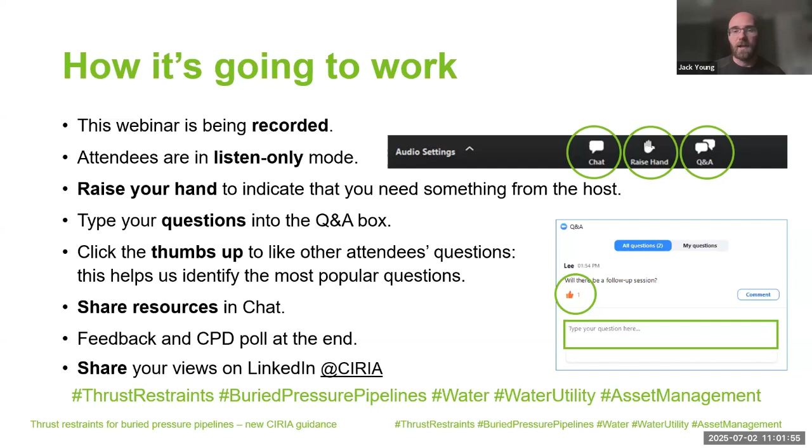Quickly, an overview of who we are for those tuning into one of these webinars for the first time. We recently celebrated our 60th anniversary as a not-for-profit member-based organisation. Our core strength has always been improving performance through collaboration in the built environment and construction sectors. We do this by delivering independent guidance, such as the SUDS manual, the Rock Manual, International Levee Handbook, asbestos and biodiversity net gain guides, and many more. We organise around 50 events per year, mostly online at the moment, ranging from topical conferences to annual debates and lectures to webinars on our guidance, such as today's topic.

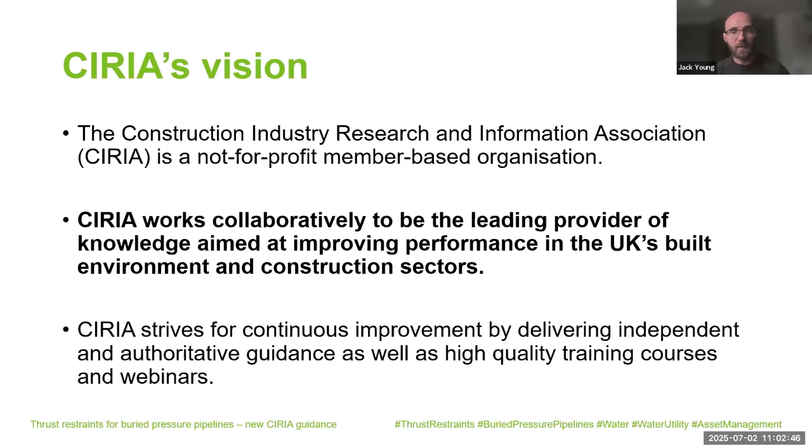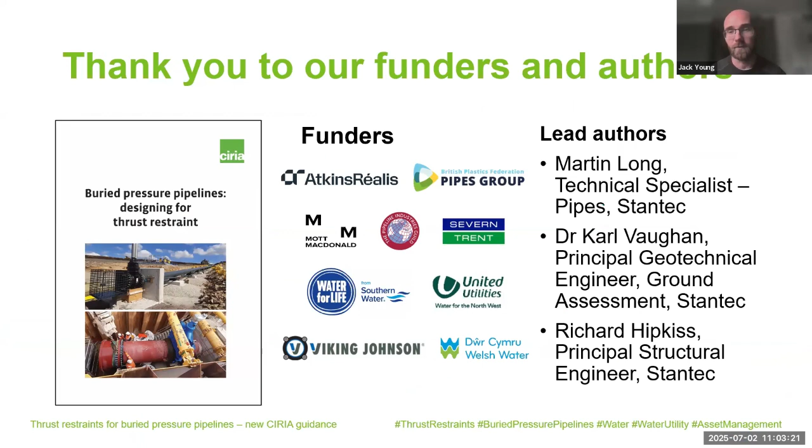I'd also like to quickly say a huge thank you to the funders of this project. Your contribution has been invaluable for the production of this work. Another quick shout out to the lead authors of the guide at Stantec, Martin Long, Karl Vaughan, and Richard Hipkiss. One final thank you to the wider project steering group who have helped review the guidance throughout the various stages of development. It's been a long time in the making, and your contributions have been vital every step along the way. I won't go through every name, but it's great to see some of you in the audience today. The project team would also like to thank Matthew Braid, Omar Shalebi, and Mayowa Sayinka, who have provided additional support in the guide as well.

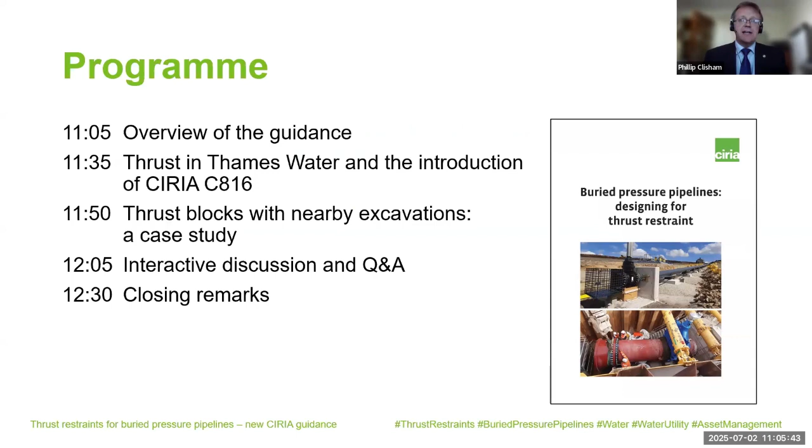Martin Long is head of Stantec's Pipe Technology Group and a very well-known technical specialist in this area. It was really good having Martin on board, and he worked very closely with Dr. Karl Vaughan throughout, who's one of Stantec's main geotechnical engineering specialists for the water sector. They were also supported by Richard Hipkiss, but it's Martin and Karl who'll be giving us an overview today. Thank you.

Okay, thanks Philip for that introduction. As Philip said, my name's Martin Long, I'm a pipeline engineer for Stantec. I've been working alongside Karl Vaughan, geotechnical engineer, and Richard Hipkiss, structural engineer, also from Stantec, plus the wider steering group on developing this new guidance, which we're going to run through today, giving an overview of its contents.

Up until recently, thrust block guidance has been written, and still is, in CIRIA Report 128. A few years ago a BS standard on restrained joints for ductile iron pipe was published, and there's also the buried pipeline structural design guidance BS 9295, and the IGN for calculating end loads on polyethylene pipe fittings. This new guide blends all of these in some aspects and brings new things in as well.

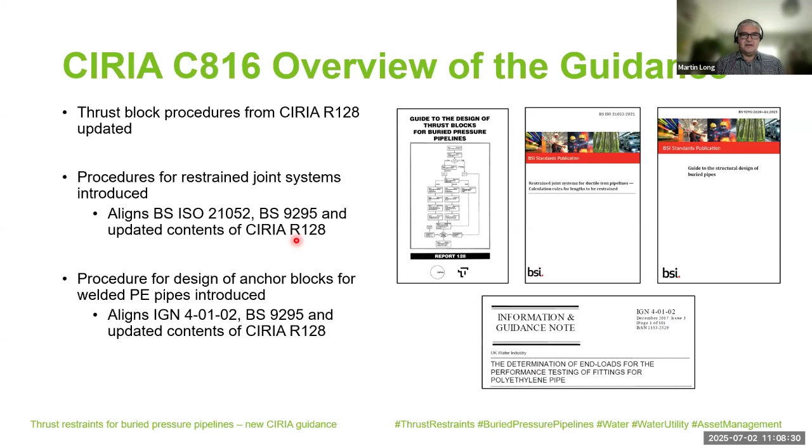In essence, many new things have been introduced, but one of the main updates to the thrust block part of the guidance is that we've now split the reduction factors, or factors involved with passive resistance and sliding resistance. There's been an acknowledgement that sliding kicks in before passive resistance, so those factors have been split. We've also introduced some side-sliding consideration on the block - there are many other changes, but those are a couple of the big ones.

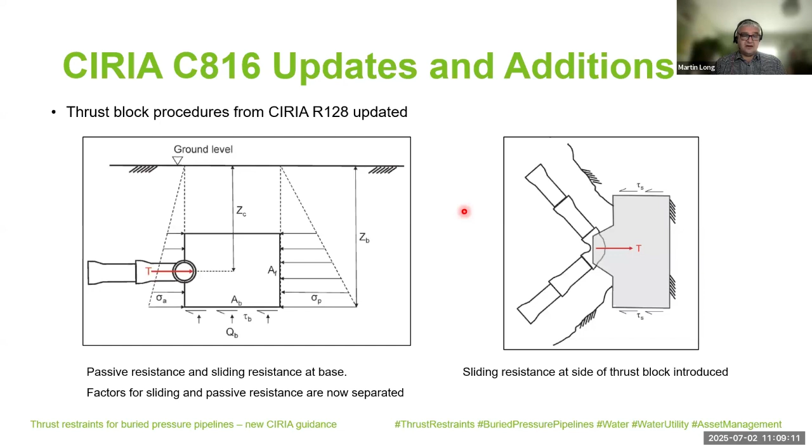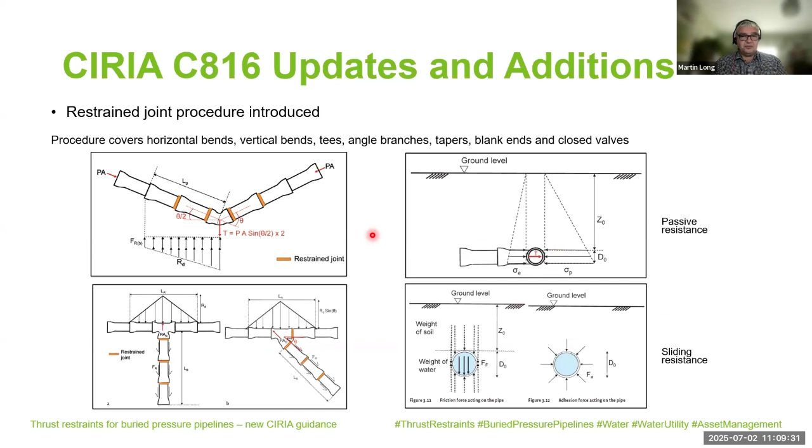The restrained joint system, which is now within this guide, is essentially the same as thrust block design - there's passive resistance, there's sliding resistance, and both methods now talk to each other. They all draw upon the same geotechnical principles.

And likewise, the contraction that you get at the end of a welded polyethylene pipe, or any kind of welded pipe really, has now been included in the guidance to prevent joint pull-out when these pipes are pressurized. What's new in this guide is that we've taken account of the buried environment to reduce the contraction force.

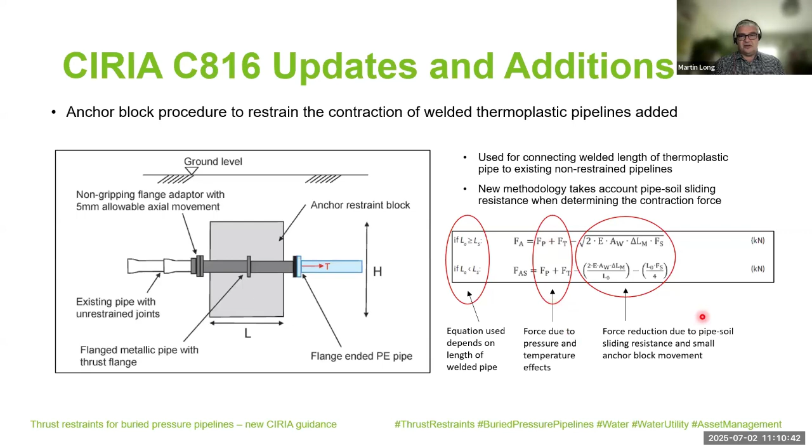Depending on the length of your pipe, you'll need to implement different formulas. This section shows how you would normally calculate your contraction force due to internal pressure and temperature changes. But then we have a reduction factor, which takes account of slight movements in the block needed to mobilize resistances, the friction around the pipe, the elastic modulus, and the amount of material, etc. All of these feed in to reduce the contraction force you're designing to.

So we'll now move over to Carl. We'll talk about the geotechnical updates we've introduced into the guide, and I'll come back a little bit later to talk about some other things we've put in.

Thank you, Martin. Yeah, as Martin and Phil both said, I'm a geotechnical engineer at Stantec, and I was mainly responsible for the wording of the geotechnical updates in the guidance.

We've introduced three new thrust restraint design classes. There were previously classes there, but we'll look at those in more detail in a minute.

We've updated the soil descriptions and classifications. They were fairly old, and they're now in accordance with the latest BS 5930.

We're now allowing a contribution from fill or engineered material, including the trench backfill, as a contribution factor to the ground resistance for thrust blocks.

We've renamed the thrust reduction factors as displacement limitation factors, which is a little bit more descriptive. And as Martin mentioned before, we've now got separate displacement limitation factors for the passive resistance and for the sliding resistance on the base and the sides of a block.

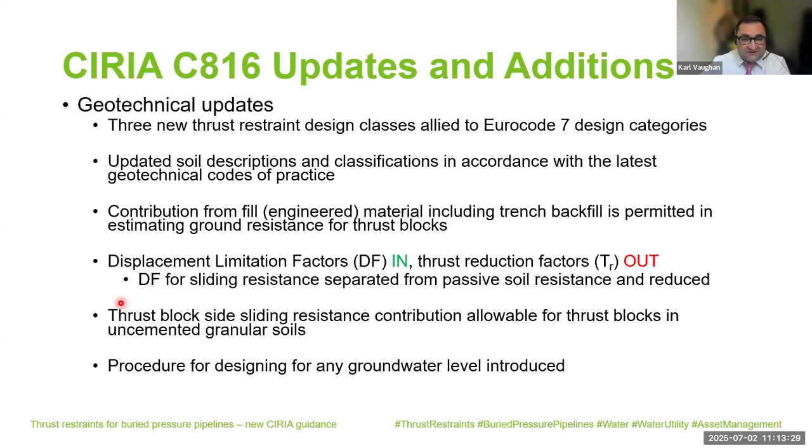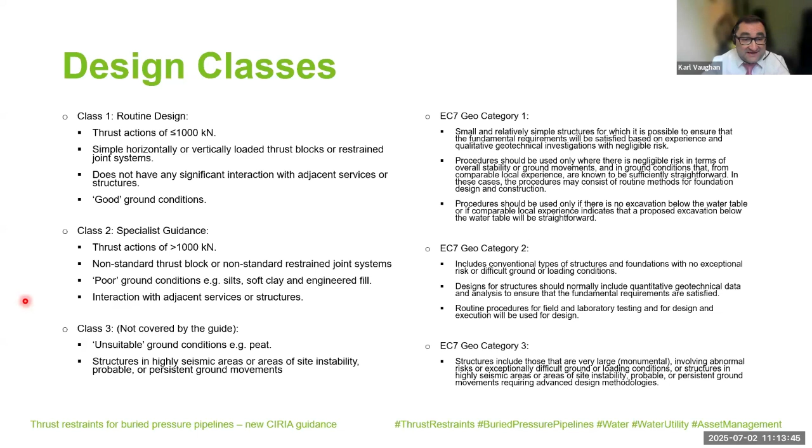Brilliant, okay. So we have three design classes. Class 1 is sort of routine designs. Class 2 is where you might require some specialist guidance, or you shouldn't design Class 2 designs without specialist guidance. And then Class 3 is basically where the guide doesn't cover this design.

They're closely allied to the geotechnical categories you'd find in Eurocode 7. You can see the descriptions on the right hand side there. I won't reread those, but basically routine design can be undertaken by any reasonably qualified or experienced civil engineer. We would still recommend that you get specialist geotechnical advice and involvement, but it can be done without that.

It's suitable for thrust actions of less than 1,000 kilonewtons, generally looking at simple horizontally or vertically loaded thrust blocks or simple restraint joint systems. Class 1 design would also be in a position where there isn't interaction with adjacent services, and within good ground conditions - so we're talking about firm and stiff clays, medium dense gravels, and some engineered fills.

For Class 2, we would recommend that specialist geotechnical guidance and pipeline systems guidance is used for the design of these. Class 2 designs can be applied to systems receiving higher thrust actions, and also for non-standard thrust block shapes - maybe those thrust blocks where the block is below the pipeline and there's an upstand to connect the block to the pipe, for example.

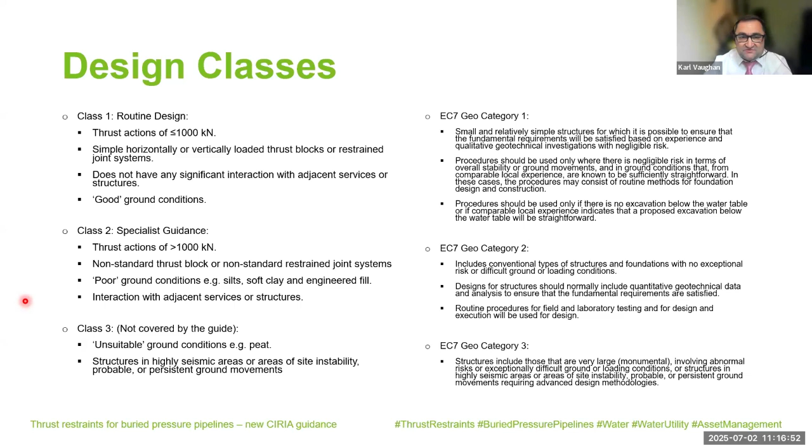And the design just doesn't cover structures in highly seismic areas, or areas with persistent ground movements where it wouldn't be suitable to provide a thrust restraint.

Okay, if we could advance to the next slide, please. In terms of soil descriptions, identification and classification, we strongly recommend in the guide that your soil or rock identification is undertaken by a trained, competent person, and supervised or verified by a geotechnical specialist.

That way you get the most out of your design, because it means you don't have to introduce too much conservatism into your parameters. The description and classification is in accordance with the latest BS 5930, so you'll see the things you're used to these days in terms of state of compaction, consistency, and strength descriptions.

We've beefed up Appendix A from the previous guide. It provides a bit more help now in identifying materials for lesser quality people - we recognise lesser qualified people.

Sorry, we recognise that these days, where we want excavations open for the minimum amount of time, you might not be doing in advance ground investigation works, and therefore the only chance you get to confirm your ground conditions is by an inspection when the excavation is open. And so the field identification procedures are really aimed at helping with that and making the most out of what you can see.

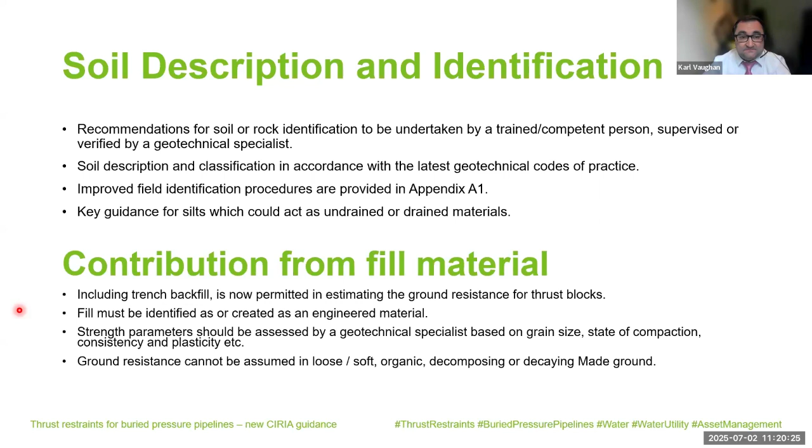Okay, so the displacement limitation factors, as we now call them, are replacing the thrust reduction factors. What we realized in looking at the old guide is that you could, on the face of it, look at it and say, why have they got those huge factors of safety? We must be over designing this. We're designing for a resistant ultimate thrust with some huge factors of safety, but actually those thrust reduction factors were there because it's actually a serviceability limit state design.

We are resisting the thrust, but with a restricted movement. You could resist the ultimate thrust without any safety factors, but what would happen is that the block or the thrust restraint would move more than could be tolerated by a standard pipe joint, and that just wouldn't be suitable. It would still fail a serviceability condition.

So the guide is designed to typically limit movements to between 5 and 10 mil, which can be accommodated by a standard pipe joint. This whole theory was defined very well in the previous guide, but the term that they used, thrust reduction factor, was not particularly self-explanatory. So in the new guide, we've called it a displacement limitation factor.

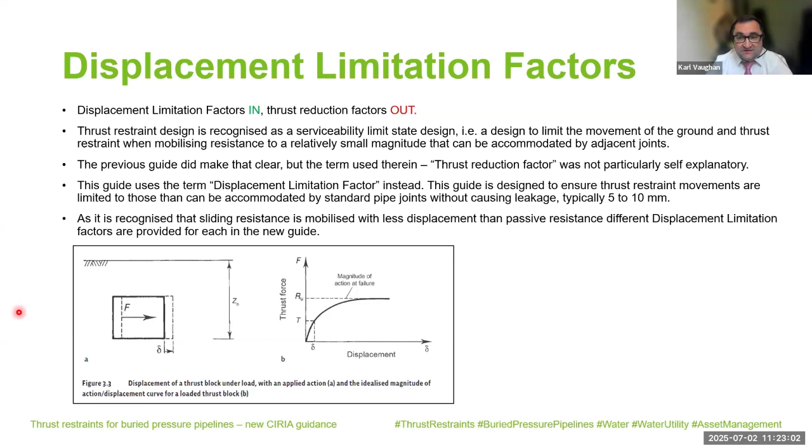There's a set that run between 1.5 and 5 as the previous guide for passive resistance, but where you're considering sliding resistance, be that base or side, the new range for the displacement limitation factors is now between 1 and 3. So we have offered some reduction in conservatism there in the design in the new guide. If we can go to the next slide, please.

Okay, as mentioned, the side sliding resistance is now allowable. This is for thrust block, and this is where the sides of the thrust block are parallel to the direction of the resultant of the thrust, and they are limited to certain soils. When you cast the block, you might, if you cast it against the clay, for example, there might be some shrinkage of the concrete or the clay because of the heat of hydration, and there may not actually be a bond there.

Certainly not quickly, and in the time between when you cast the block set and the first activation of the thrust force comes into action, we've only considered sliding resistance for uncemented granular soils, which immediately you maybe remove trench supports, they will apply themselves against the thrust block with a minimum of active pressure. So what we're saying is you can allow some sliding resistance along the sides of a block in uncemented granular soils. It's a little reduction in conservatism over the older guide, and it is helpful, particularly where you're designing a block that only relies on sliding resistance.

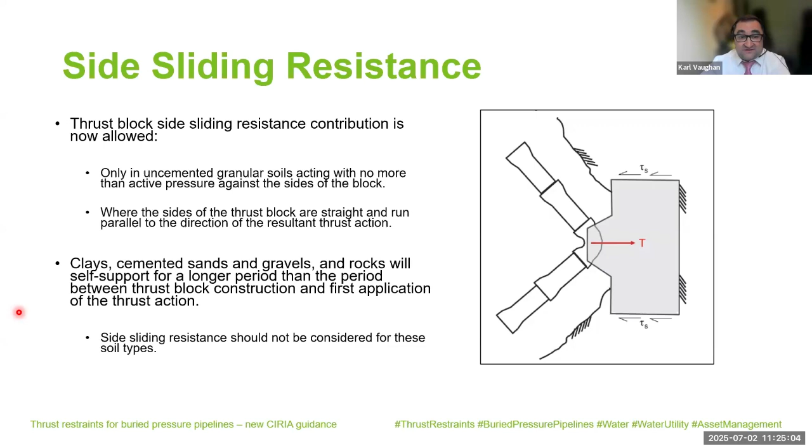There are some situations where you may wish to have an open excavation in front of the block, and so you have no passive resistance. You're designing with side and base friction only, and in that case, it would be helpful.

Okay, I think Martin and I are really happy with this one. The previous guide mandated that you either design with groundwater level below the base of a thrust block, if you knew that was clearly the case and would be for the lifetime of the thrust block, or it said you must design with groundwater at ground surface. Particularly where you had granular drained materials, that created a huge reduction in the passive resistance that you could estimate, and therefore blocks were turning out really quite big with groundwater at ground surface.

What we've done, we've introduced a buoyancy coefficient, which essentially looks at the depth of the water in relation to the base of the block. The higher the water is, the bigger the contribution from the groundwater is, the greater the reduction in unit weight of soil that must be applied. Therefore, if you have a low water table somewhere within the block, you're able to make savings in block size over the blocks that you would have designed using the previous guide.

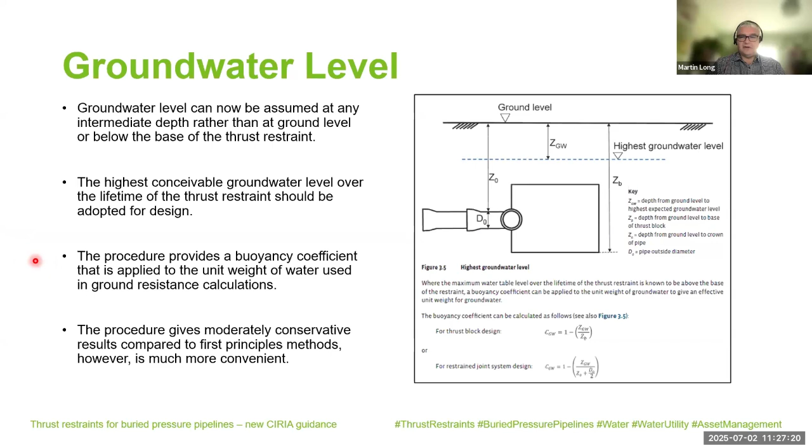I think I'm going to hand back to Martin now. Is that right? Yeah. Thanks, Karl. Just make sure that's it. Okay, we got that. Okay, thanks for that, Karl.

Whistle stop tour of the geotechnical updates. There are a number of other procedures that have been introduced into this guide, and there's a list of them, and we'll touch on them each individually.

So we have introduced overturning stability, and I'll talk about that a bit more in a minute. We have allowed bracing against decommissioned pipes, and brought in a method for using that as thrust restraint where you can't necessarily use a restraint joint system or thrust block. We've looked at how you connect a new restraint joint system to an existing non-restrained pipeline, and provided an additional method for being able to do that, which will allow you to take account of the short shutdowns that we're often restricted by. We've introduced guidance on under pressure connections, which was touched upon earlier. We've expanded guidance on the use of thrust block keys, how they can be used. We've also brought in, and this is a very important one, a calculation for the minimum distance your thrust block needs to be from adjacent excavations or adjacent structures. And then there's been some guidance written on the actual structural design, reinforcement concrete design of a thrust block.

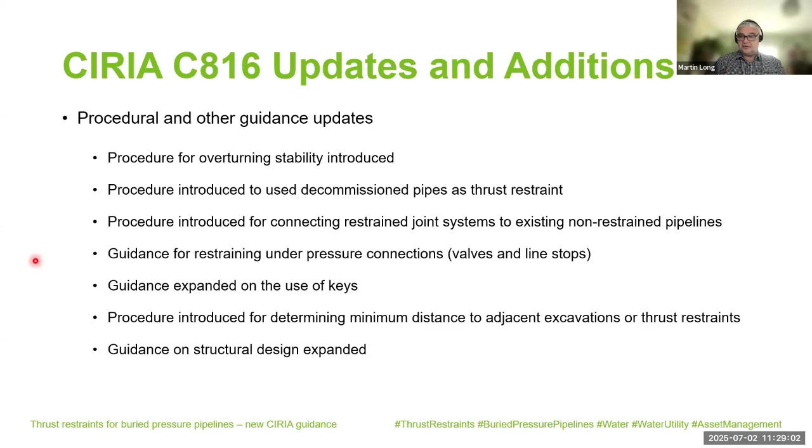Okay, so overturning stability. Previously, the design guidance was all based on the action of thrust at pipe level being central within the block, and that didn't really allow much scope for transferring the thrust forces down below the pipe, which is often required. Our pipes are often at levels where there's lots of other utilities, particularly in urban environments, so you might want to go down deeper to anchor your restraint. This new procedure allows you to do that - you can effectively bring the thrust restraint down below the pipe level where you may have other services, avoid all of that and design in that way.

So in order to do that, we've obviously got some eccentric loading on the block. We've introduced this situation where we check the overturning - a very simple overturning procedure - and the most efficient type of thrust block that you'll get is one that's buried. So we may need to try and adapt construction practices to make sure we can bury where we can, and all of the weight of the backfill over the top can also be used for this resistance to overturning.

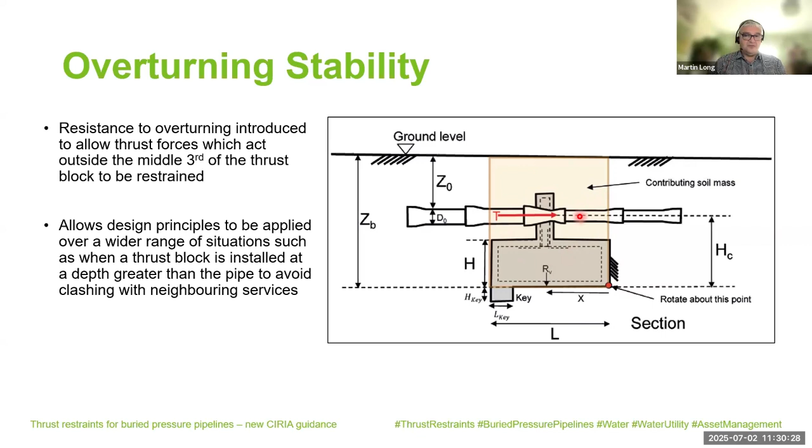Using a decommissioned pipe, sometimes we need to cap off. Very congested, very tight. We've certainly seen it done before, examples where the end cap is braced against the abandoned pipe. So what we've done now is formalised that into a method that can be used, and that involves grouting up the pipe you've abandoned, so the grout or concrete can interact with the pipe material. We then calculate the length needed to provide that restraint, and you bear against that. So that's just another option in the armory to deal with thrust forces on pipelines.

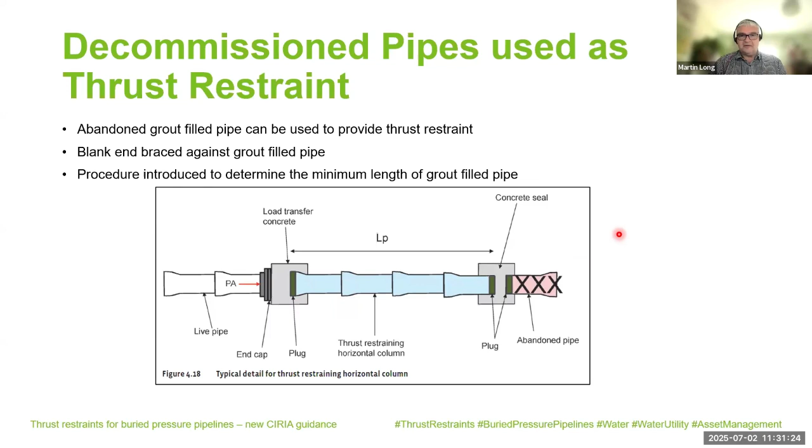We've looked at constructing a brand new pipeline offline, often using restrained joint systems, while the existing pipe remains live. At some point you're going to have to connect in, which will mean using a bend to connect into. That's often very challenging, because getting a thrust block behind this bend when the pipe needs to go back into service within a few hours can be very, very difficult.

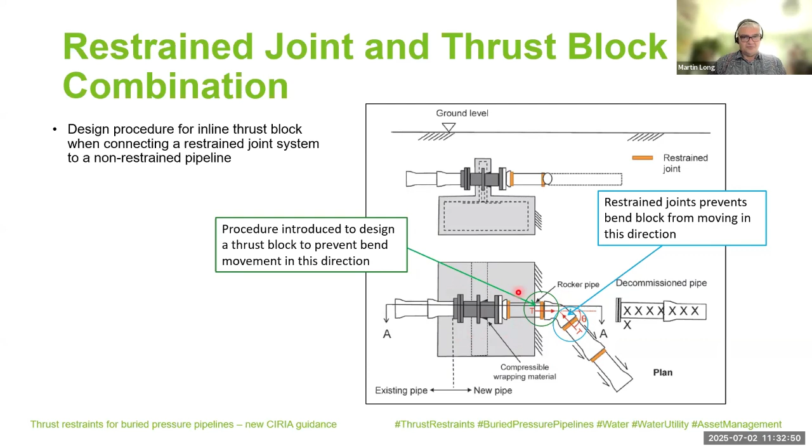So what we introduced is a way of designing an inline thrust block. You only need a short shutdown to chop out a piece of pipe, introduce a thrust flange, and piece the pipe back together. We've got the design procedure for that inline thrust block, and as you can see, it's on the existing pipe, so you're not bearing on the new pipe you've just put in the ground. It follows the general theory that your thrust force is coming this way from a bend, and it collides with a thrust force coming that way from another bend. The restrained joint deals with this side, and the thrust block deals with that side. If the pipe can't move that direction, and it can't move in that direction, then nothing's moving. So this is a slightly new procedure introduced to allow for that situation.

And then restraint of under pressure connections - these could be line stops, under pressure valves, or under pressure T connections. All of these situations will generate a thrust force within the pipe. Some will be inline in an existing system, some will be teeing into an existing system. If you're using a restrained joint system, there's a realization that you can still get some stretch in the system as the restraint mechanisms link and connect. If you were using a completely unrestrained system to tee in with, you would design a thrust block in the normal way using the T procedure. However, if you're using a restrained joint system, we just say we need to provide some support around the back of this to encourage any flex or stretch in the system to follow the line of the restrained joints, rather than overstressing the pipe we're connecting to.

Similarly, for an inline restraint, under pressure valve, or under pressure line stop, we need to bear in mind that with thrust blocks and thrust restraint, what we're trying to do is limit movement to very small amounts. Even with an inline spigot socket system, that force is going to compress these joints, which could overstress the end of the joint. It could cause leakage at the back of the joint, and leakage is ultimately what we're trying to avoid, because it can wash out surrounding ground and failures could develop over time. So we've basically introduced methods for you to design thrust blocks for these under pressure systems.

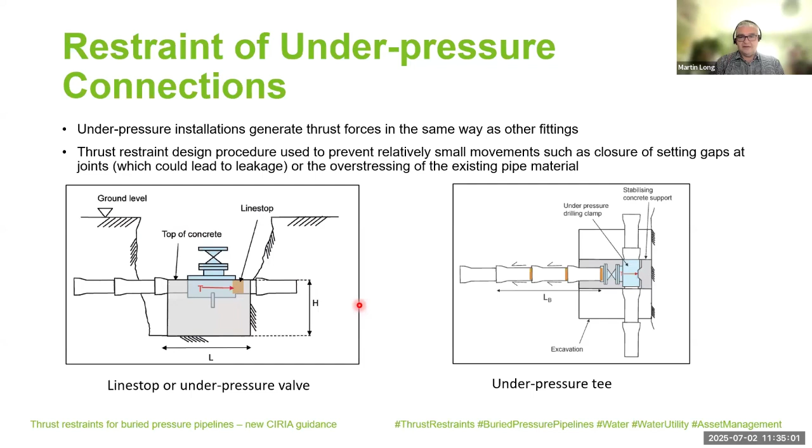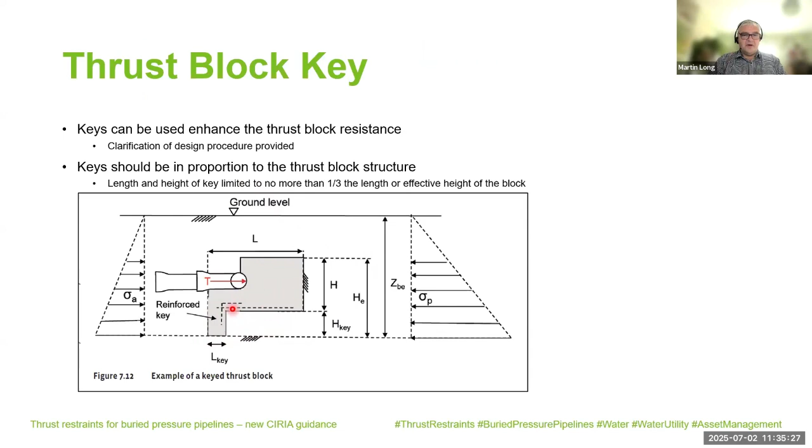And then some additional guidance on thrust block keys to help with that. The key should be in proportion to the block, and the guide limits these keys to about one third length and one third height. If you want to go beyond that, it's not within the guide, and you need to determine for yourself whether it's appropriate and the block will remain stable.

And then I'll hand back to Karl on this one. This is the one that I think a lot of people have been really quite pleased about. If we design a thrust block and we need to excavate downstream of it, how close can we get to it? How far away do we need to be?

You're on mute, Karl.

The block relies on passive resistance to the ground. We have a passive wedge in front of the block, and there's an active wedge associated with a downstream excavation, and we just don't want the passive and active wedges to overlap. So we work out the minimum distance based on the size of those wedges, and providing your excavation is further...

The same can be applied to blocks on adjacent pipelines. If the thrust forces are acting in the same direction, then you'll have a passive wedge and an active wedge on the second block. If you've got blocks with forces in opposing directions, say where you get to a T-junction, you've got bends going in opposite ways, you might have two passive wedges.

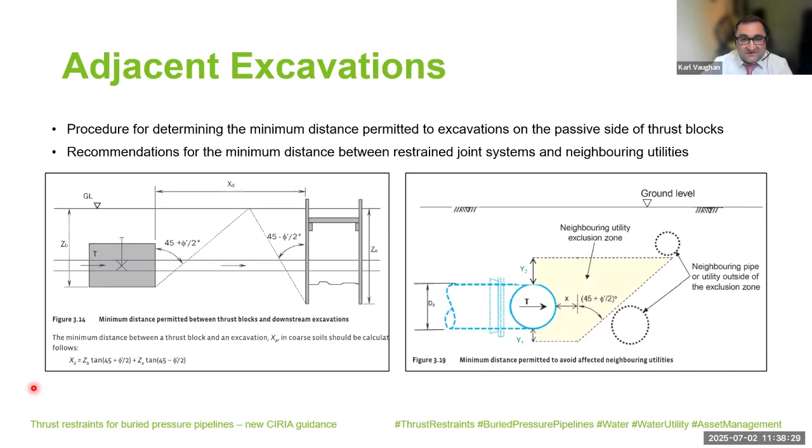Okay, I'm going to hand back to Martin very quickly. Okay, thank you. So just finally, just to cover off some small points about the structural design.

We often see concrete reinforcement designed to Euro codes, which are related to buildings and bridges and things. So basically we put some words in to say that's not necessarily required for crack width, and really to only put sufficient reinforcement in that is required for the stability and the longevity of the block. That might be needed for things like upstands, keys, under pressure connections, and things like that. And also for the structural engineer to understand how the loads, the pipeline or the design engineer have generated those, because sometimes they would already have factored the loads. So the structural engineer needs to understand how they've been calculated, so as to not double factor and try to reduce that reinforcement.

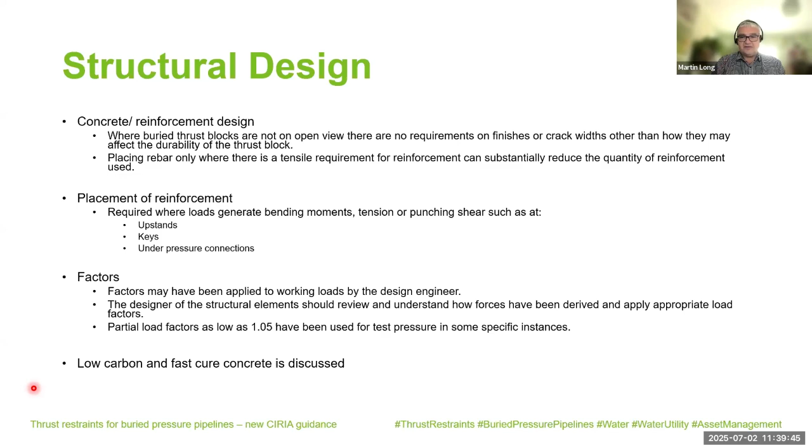Okay, and low carbon concrete and fast cure concrete has also been discussed. And that brings us to the end of explaining the updates. And we'll hand over back to our chair, Phil.

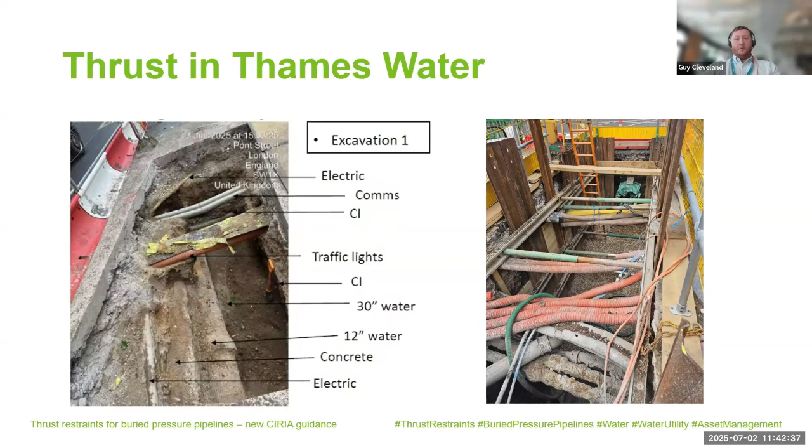Within Thames Water, and I'd say the wider industry, in my experience thrust blocks are often misunderstood. In my role I see more than my fair share of ill-conceived thrust block designs. I see some really great stuff as well—I'm a nerd, I'm not afraid to admit it, I love seeing a good thrust block design. If I speak to our contractors, but not exclusively our contractors, thrust blocks are often seen as unnecessary, expensive, impossible to fit in, and sometimes they are.

And I think CIRIA 816 is going to help address some of the issues we see. So like I said, Martin and Karl have done a great job introducing some of the changes, and I'm just going to give a bit more Thames flavour to that.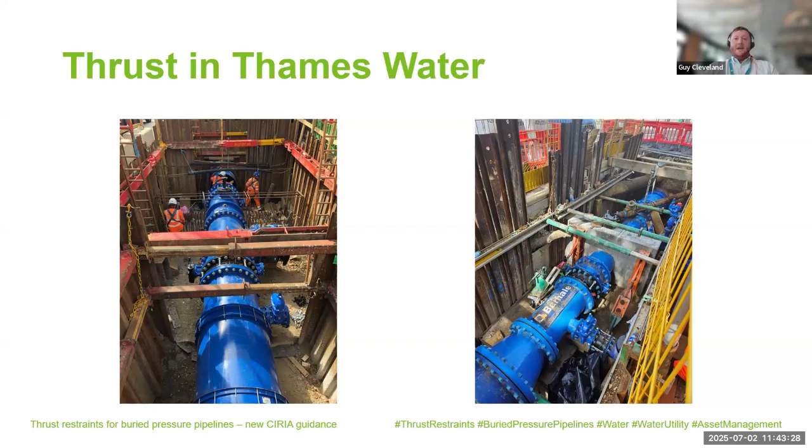One of the things I've got involved in is looking after our asset standards, but also reviewing waivers against those asset standards. Currently in our general civil standard, thrust blocks that aren't designed in accordance with CIRIA 128 must have a factor of safety of 3 against overturning without making use of the overburden. As you can see, two-thirds of the waivers we see are in relation to that.

Because of the congestion, we often end up designing the thrust blocks Martin spoke about with quite significant overturning moments applied to them. So waivers previously have been approved for reduced factors of safety ranging as low as 1.1 without the use of overburden, up to maybe 2 or 2.5 with it—but we are routinely up against this and have to account for it.

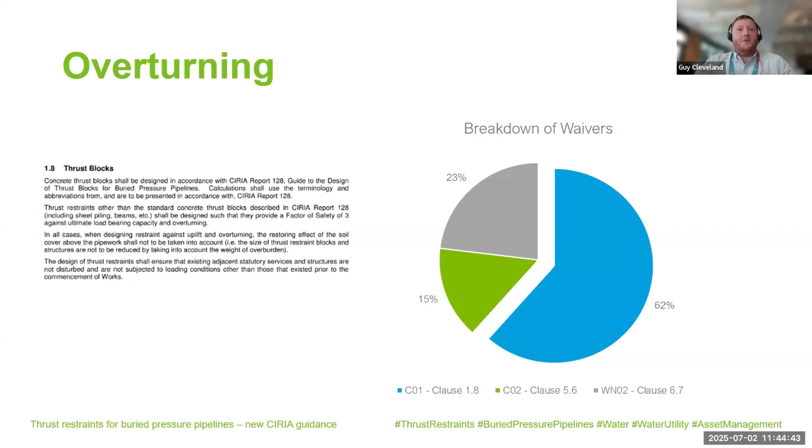So the introduction of a standardized approach to overturning means I can very likely remove this clause from our civils specification. It should give rise to a reduction in thrust block size across the patch, but also, critically for us with such a big program, allow us to deliver at more pace. Not having to wait for waivers to be approved prior to going into construction is going to be really useful for our design and for our contractors.

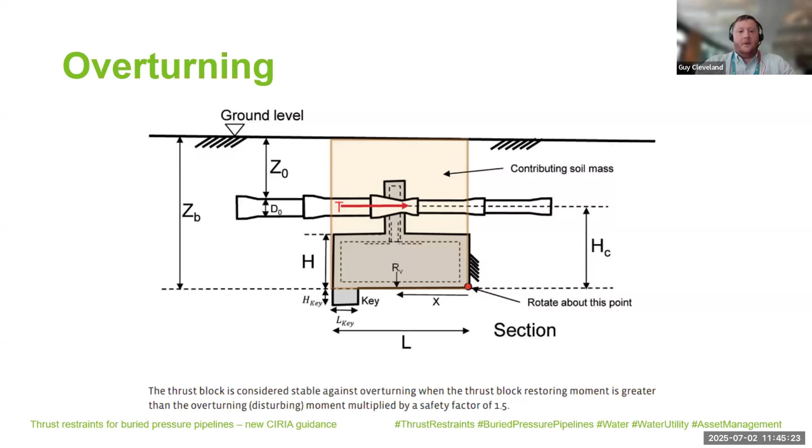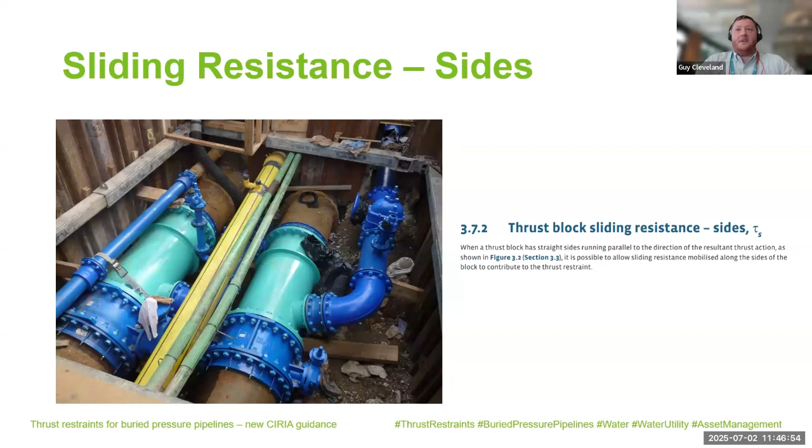We couldn't put a piled thrust block solution in here, so we really had to find something else. With the space available, following CIRIA 128 strictly, our achievable thrust reduction factor was less than 1. But luckily a very clever engineer suggested, how about we make use of the resistance at the sides, and that allowed us to get a thrust reduction factor of more than 1—though I don't think much more than 1. But equally, this thrust block is still in service today, no known issues. So it does work, and here it really got us out of a tight spot.

So I think the wider industry has been picking up that this is an issue, and certainly in conversations I have with other water company employees, people are starting to see this as an issue. Thames, we do see failures, not regularly, mercifully, but we do see failures. In my experience, these are often misunderstood, and the cause of failure is often misattributed.

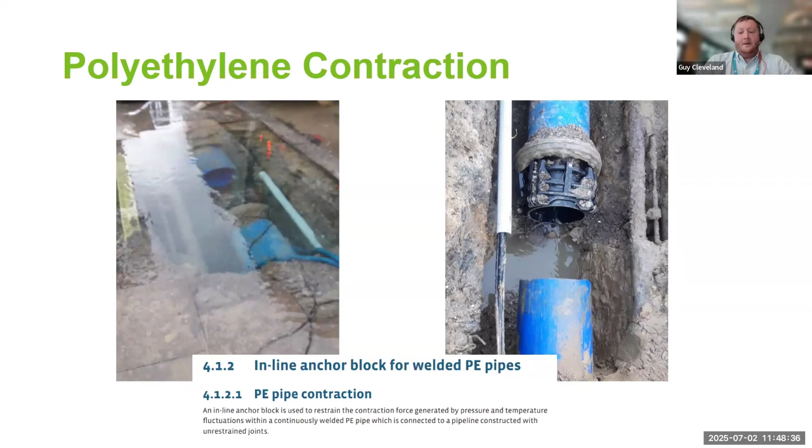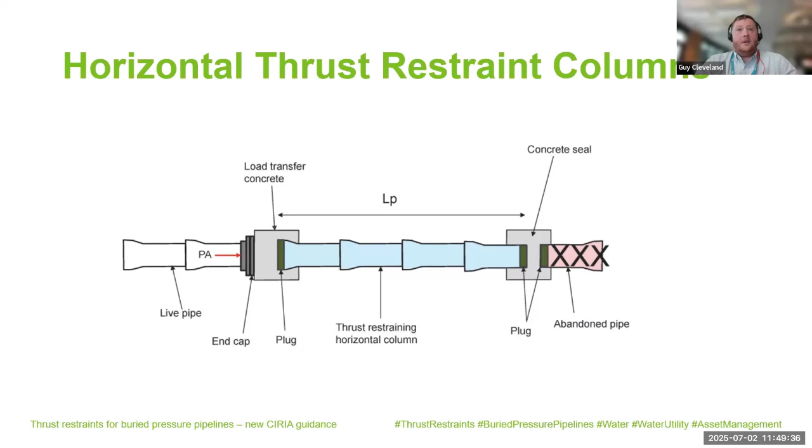As I said before, we're doing 585 kilometers of mains replacement this AMP. In lots of instances, we are installing new valves, bends, etc. Lots of polyethylene, but certainly in conversation I've had with some of our contracting partners, they're open to the use of using some restrained pipe systems in place of thrust blocks. Also potentially using thrust blocks in concert with restrained pipe systems to reduce the overall kind of burden on thrust.

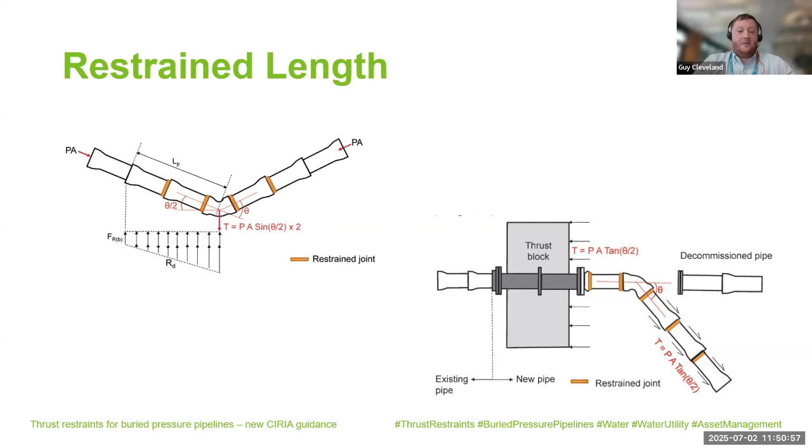I know that there was a British standard introduced, I think it was in 2021. I would say uptake of that has been relatively slow. Certainly we're not seeing it being widely adopted or widely used by our contractors. But its inclusion in 128, it will mean that it becomes a standard approach for Thames, and I think is going to bring significant benefits, particularly to the mains replacement program, but also across the estate.

And I've got to the end in about the time that I said I was going to take without getting a watch tap from Phil, so I'm very happy with that. You've dragged some time back. Well done, Guy. That's brilliant.

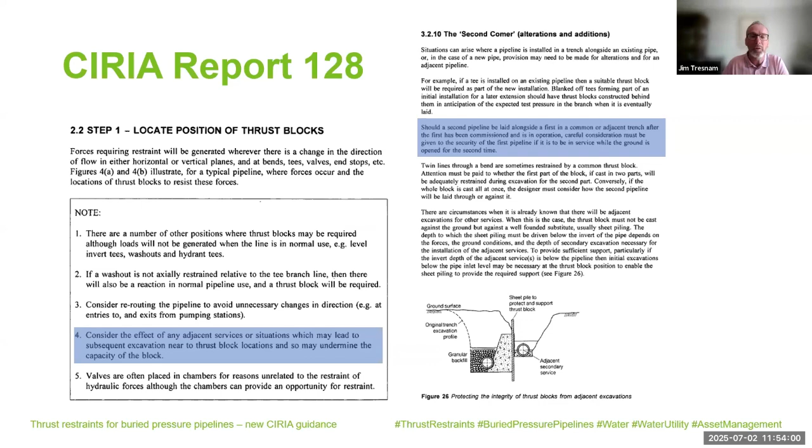It recognized it, but it didn't give us any mechanism for assessing what the potential consequences would be, and how we define how close we can work to existing thrust blocks without potentially undermining them. So our new document, which I'm glad Guy was also struggling with the reference for, because I'm still coming to terms with it, the new C816 document

starts to address this, or more than starts, it gives us a really good way of addressing this. Carl touched on this earlier, that I was going to theme on this subject, and I've just tried to clarify what's written in the document, but with this image where it articulates clearly where the passive and the active zones are in relation to the thrust block on the left-hand side and the excavation on the right-hand side.

And it says, to ensure the passive resistance on an existing thrust block is not compromised, the passive wedge of soil acting against the bearing face of the block and the active wedge generated by the downstream excavation should not be allowed to overlap. So we're trying to avoid those two triangles coinciding, and if that situation occurs, then we've got a potential failure to occur.

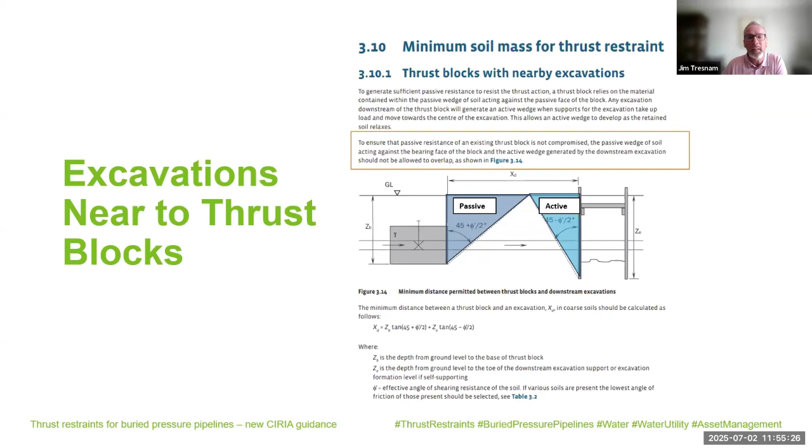So what I wanted to do was touch on an incident which we had in United Utilities, and I'll hopefully tee up the description by describing the system that it happened on. So this is a drawing of an aqueduct, part of an aqueduct system that we have.

The three lines of pipes, 2 cast iron, 1 steel - not welded steel as you may assume, but steel with lead run joints, so a push fit type of socketed arrangement - and obviously what we're looking at here is what we describe as a crossover arrangement.

So if we have a burst or we need to take a section of one of the mains out of service, we then have the facility to cross feed flows from one pipeline to the adjacent pipelines over that section which is isolated, and it obviously helps to maintain the capacity of the system and allows us to keep the supplies going as well as we can.

So here in this image, running off to the top side, we've got some scour pipe work which can drain the pipe work, and at either end we have these - what are commonly described as bus bars, which are the crossover arrangement - and in between are the valves that would isolate the system. So that is the general purpose of this piece of pipe work.

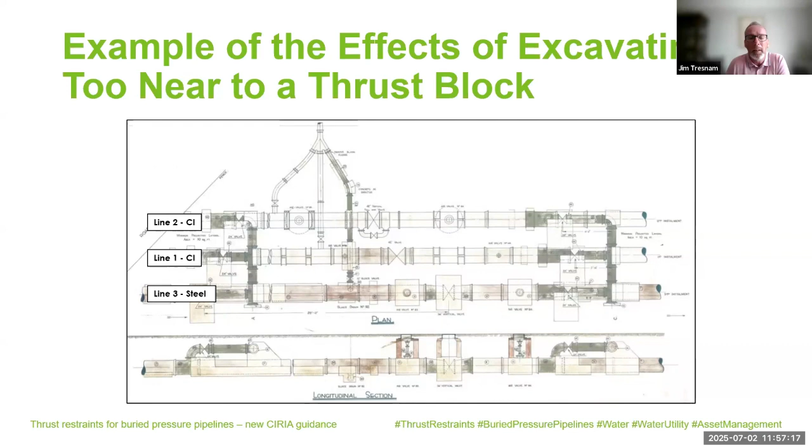So the example that I wanted to give was when we tried to do some work on an upstream section of the pipe work on the centre line, on line 1, the cast iron pipe. The activity we were undertaking was in order to enhance the life of the pipe and improve water quality. We were undertaking a slip lining program of the pipes.

I should say that these pipes are all approximately 40 inches in diameter, a metre if you're not into old money. So essentially, we were putting in a large diameter pipe, 900 diameter PE welded pipe that would be slip lined into the existing host pipe.

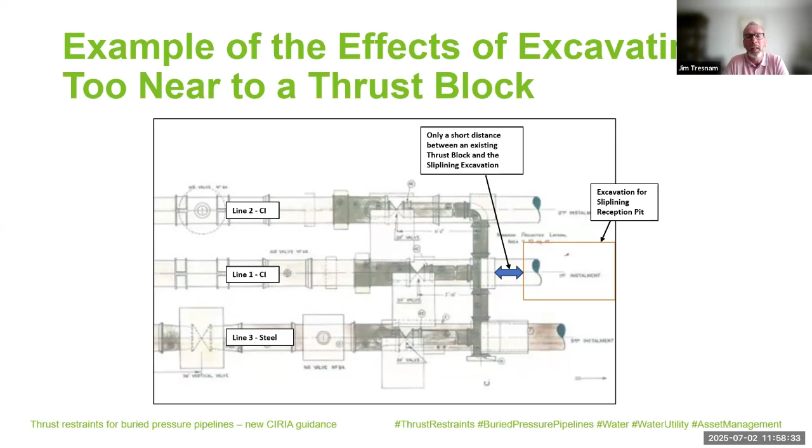And as part of that work, we undertook an excavation for a reception pit for the slip lining, immediately downstream of one of the crossovers, behind a section where there was a thrust block, obviously aligned over the top of the existing main. So that was the work that we were undertaking.

And what happened is we identified after the event that we had a burst event that occurred. We identified after that the cause of the burst was the proximity of the excavation for the reception pit on line 1. It wasn't immediately apparent because it wasn't just line 1 that failed, but line 2 also failed during the incident. But it didn't happen immediately.

We had the excavation undertaken, and it was open for several weeks before the full incident unveiled, and we had a major burst event occur. So, there was presumably some initial ground disturbance, but it took a while to materialize, and the disturbance occurred later.

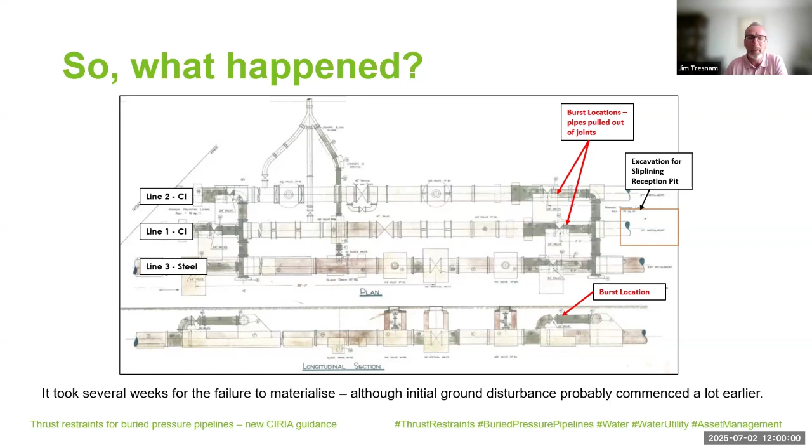Sorry, the initial ground disturbance probably commenced a lot earlier than we understood, because of that we hadn't seen it until the failure occurred. So this is a sequence trying to explain how the incident unraveled.

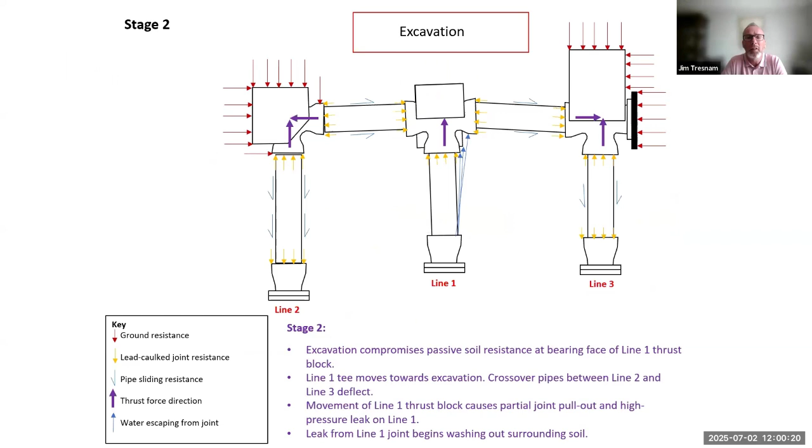It's going to skip through into stage 2 now, where the excavation has been undertaken. It's compromising the passive soil resistance to line 1. Lines 2 and 3 are starting to move, and we've got a leak occurring at line 1 from the bottom edge of the existing socketed joint.

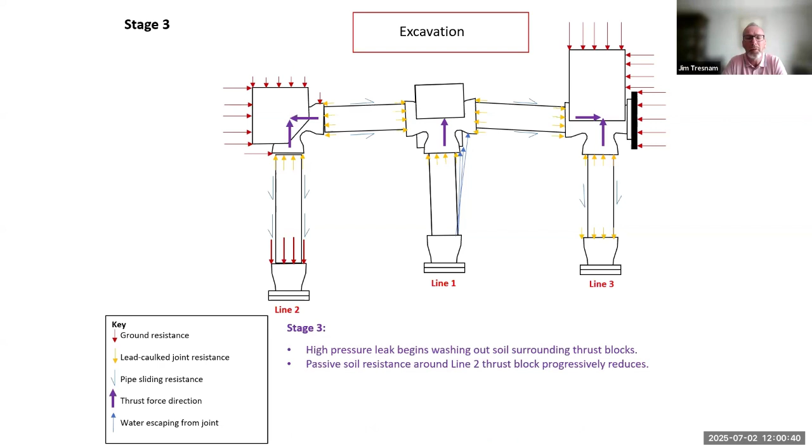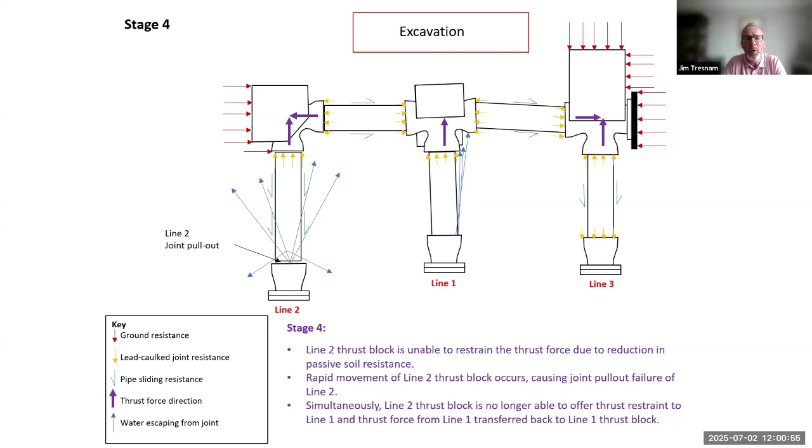That is then a high pressure leak, which starts to wash out the material surrounding the thrust blocks, and we lose the passive resistance. Line 2 thrust block is then unable to restrain the thrust force, and the rapid movement of line 2 thrust blocks causes the joint failure on line 2, and then simultaneously line 1 is pulled out as well.

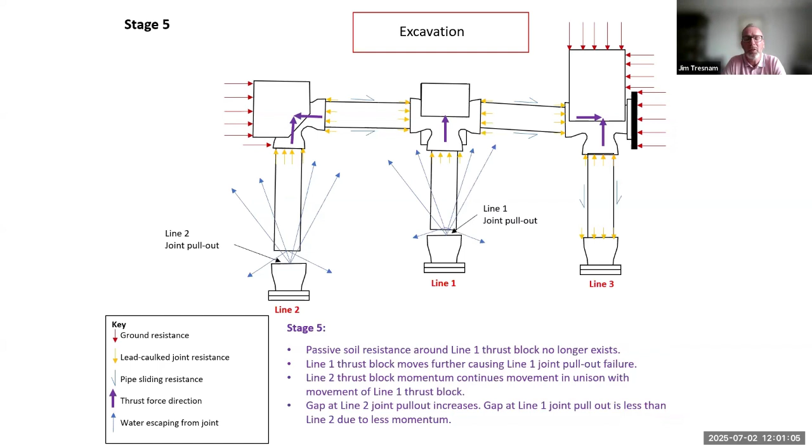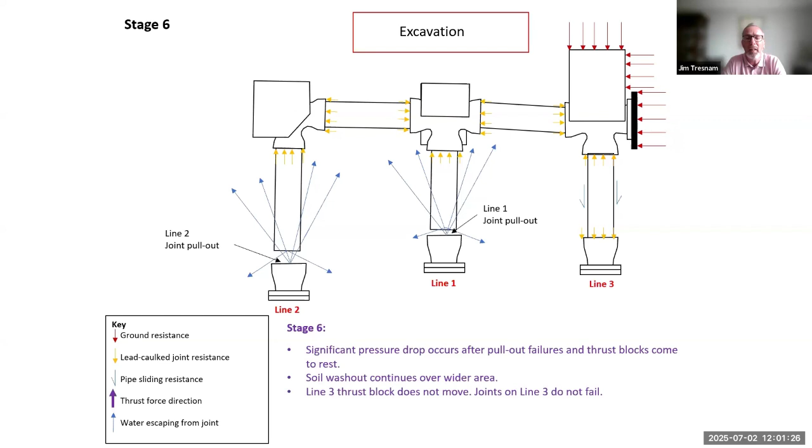The passive soil resistance around line 1 thrust block no longer exists. The thrust block moves, causing line 1 to fail, and line 2 thrust block momentum continues in unison with line 1. Ultimately we have a significant pressure drop, and the thrust blocks come to rest, and the soil washes out a wider area, but line 3 doesn't move. The line 3 joint stayed intact, and that pipe didn't actually fail.

So that is the at-rest position, and this is what it ultimately looked like. What you can see here is we've got the 2 open joints on the left-hand side of the screen, adjacent to the brickwork, line 1 being the center pipe. This picture is taken from pretty much on line 3, and line 1 and line 2 have both moved.

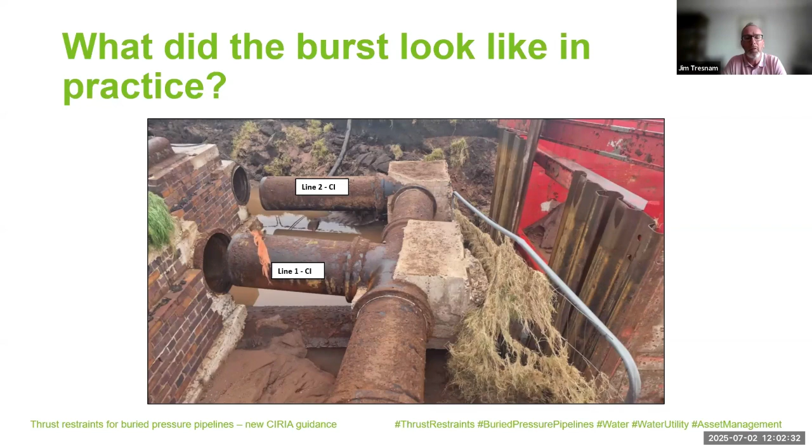Being opened up, you can see the distance between the thrust block and the excavation. I think the thing that isn't probably initially apparent, and I need to reinforce it, is that when this was occurring these pipes weren't exposed. They were fully backfilled, and the ground level was at the top of the brickwork you can see on the left-hand side. So we've lost an enormous amount of ground from around the pipes. It's quite sandy material.

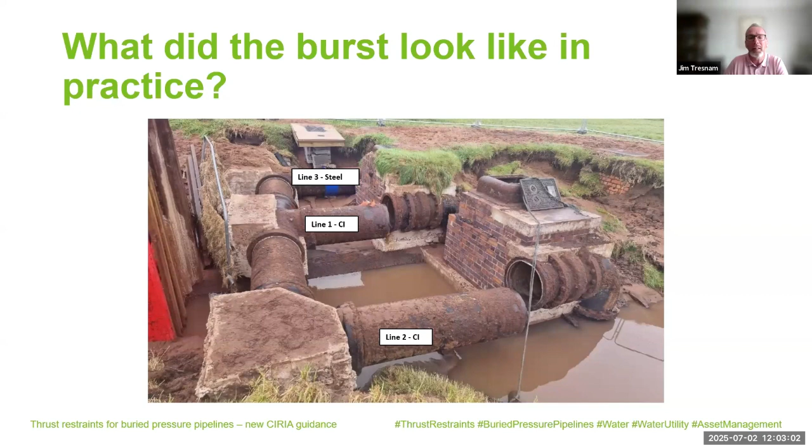Flick on, we can now look from the opposite side, and you can see some of the displacement and movement of the joints. But again, it hopefully reinforces the amount of material that was washed out, and the proximity of the excavation on the downstream side. The purpose of sharing these slides with you is to hopefully demonstrate the impact of an event such as this.

Many years ago, one of my predecessors was called out by the police, and it wasn't in relation to a thrust block, but one of the aqueduct pipes had burst, and the police believed it was some sort of terrorist action because of the crater that had been formed by the washout, and the volume and pressure of water coming out of the pipe as a consequence of the failure. So this is quite dramatic when you see it in the flesh.

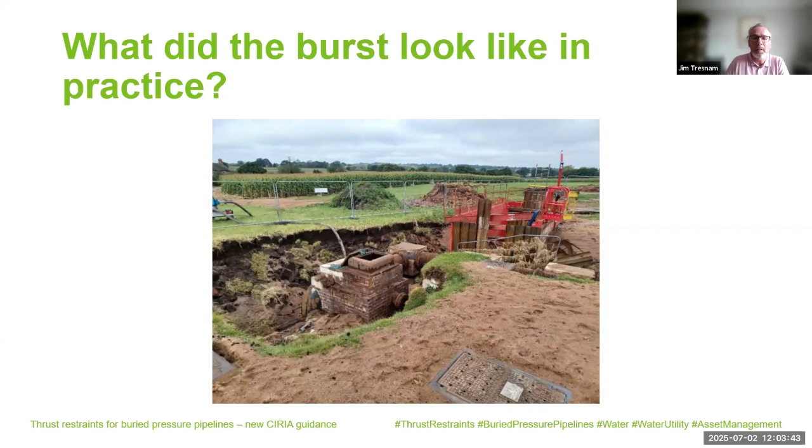So in there we go. Sorry, too laggy.

So in summary, as I said, the issue of excavations adjacent to thrust blocks isn't a new one. It's been understood, it was understood in CIRIA 128, but they hadn't gone so far as being able to identify a method for assessing when this was an issue.

The new guide, C816, defines a method of ensuring the passive resistance of an existing thrust block is not compromised. It introduces a displacement limitation factor, which Martin and Carl described before, this DF value, which is used to limit movement to very small amounts, thus preventing leakage at joints. And this is what we've seen here.

We've seen a jet that initially occurred due to a small amount of movement, and that has removed the fill material from around the pipe and caused the greater event to occur and the sudden failure of the pipe. So I just wanted to emphasize that when we've failed to identify this as a potential issue, relatively small movements in a pipe can cause leakage, and that can then set off a chain reaction, which should be avoided and is quite dramatic.

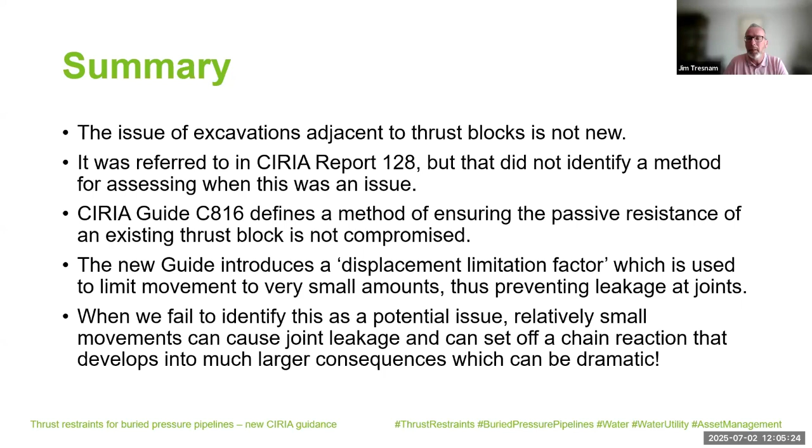So that was my piece. Thank you for listening. Thanks, Jim.

That's brilliant, and illustrates what happens when we get things wrong.